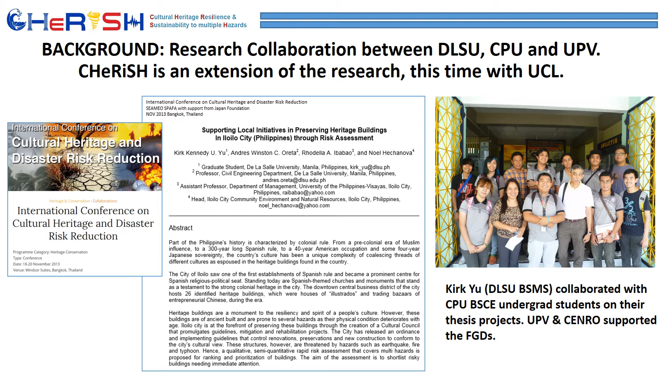First, let me present some impact of natural hazards to heritage structures, specifically during the Bohol earthquake of 2013. The Bohol earthquake is one of the strongest quakes in the Visayas in 23 years. It is described as an earthquake with energy equivalent to 32 Hiroshima bombs. It was a magnitude of 7.2, and from this earthquake there were many old churches which were damaged and destroyed.

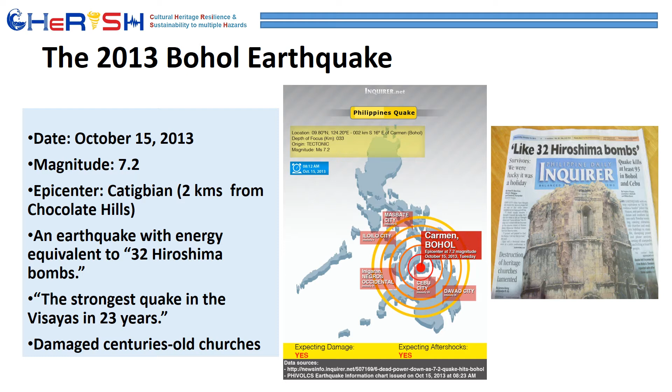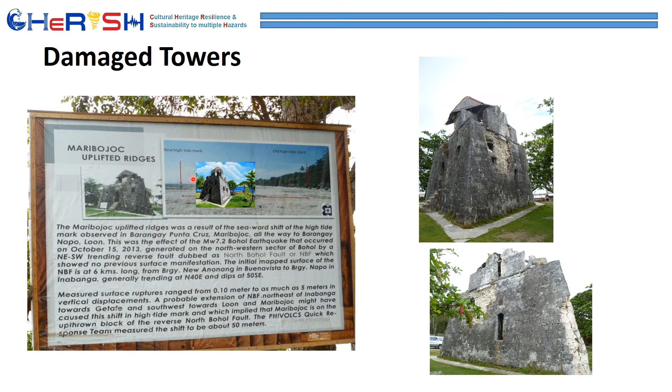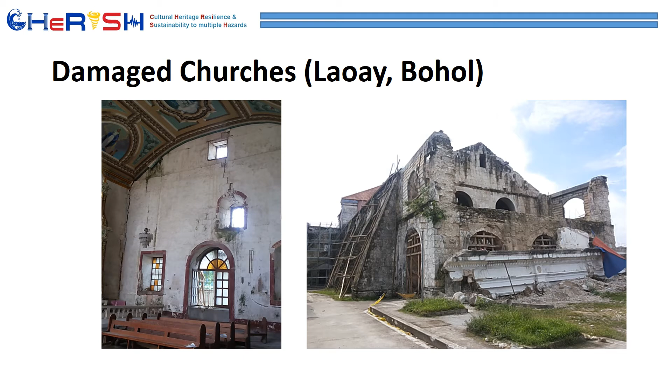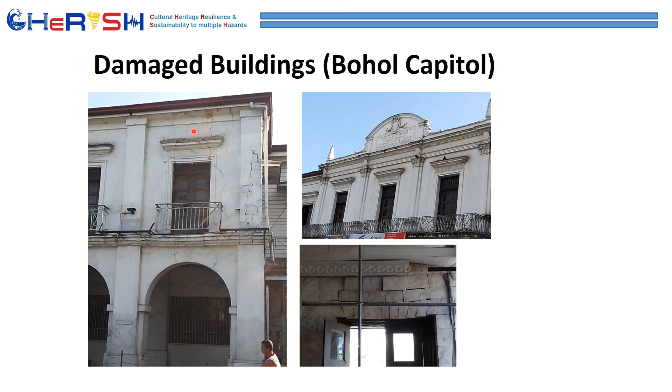So the question is, why do we need to preserve our heritage structures? Let me quote the quotation by Sui Yao. Says, "The old house is like a book. Enter and read it, and you will find yesterday, today, and tomorrow written on the page."

So basically, cultural heritage preservation is all about maintaining our nation's shared links with the past, the people's shared connections. Cultural heritage is also a set of symbols or links to the past. So imagine the impact of the earthquake in Bohol, wherein many churches were destroyed, some of them totally collapsed. Hence, the past about that particular structure is lost.

Let me present some principles and definitions on heritage conservation using the book by architect Augusto Villalon on Lugar, Essays on Philippine Heritage and Architecture. Architect Villalon is one of the advocates on heritage conservation, not only in the Philippines but all over the world.

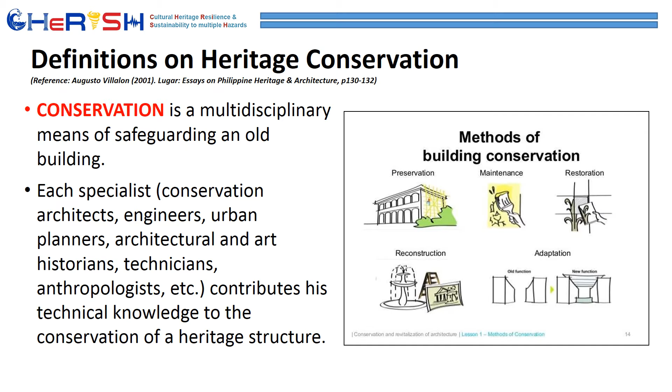First definition is conservation. It is actually a multidisciplinary means of safeguarding an old building. It involves conservation architects, engineers, urban planners, architectural and art historians, technicians, anthropologists, and many more. And they contribute their technical knowledge to the conservation of a heritage structure. There are various methods of building conservation, and let me define each of these methods.

Preservation is the cleaning and maintaining of a structure in order to extend its lifespan. This is the optimum and the best thing to do in heritage conservation. Shown on this slide are heritage structures. This one is the Intramuros Church, the San Agustin Church, which was not destroyed during World War II. And of course, Iloilo's pride, the Miag-ao Church, which is a UNESCO World Heritage Structure.

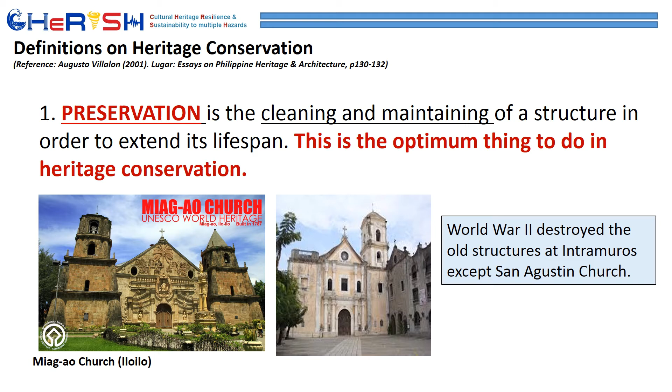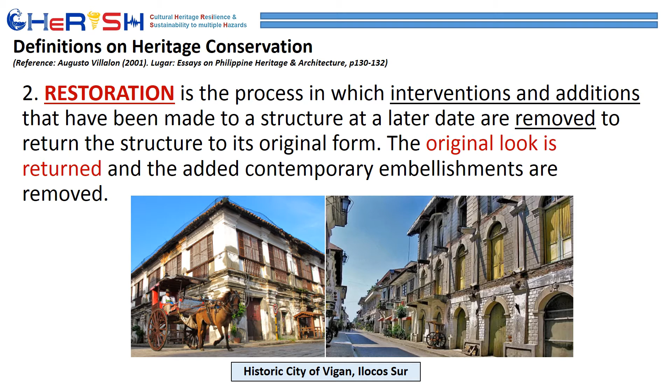Reconstruction is the rebuilding of a faithful copy of a structure based on original period plans and done under strict supervision by a conservation team. The classic example of reconstruction is, of course, the heritage structures in Intramuros, since most of the structures except the San Agustin Church were destroyed during the war. And these structures now at Intramuros are basically reconstructed heritage structures.

Another example is, of course, the Las Casas Filipinas de Acuzar. It is an open museum in Bataan. Some of the structures are original, some of the structures are reconstructed.

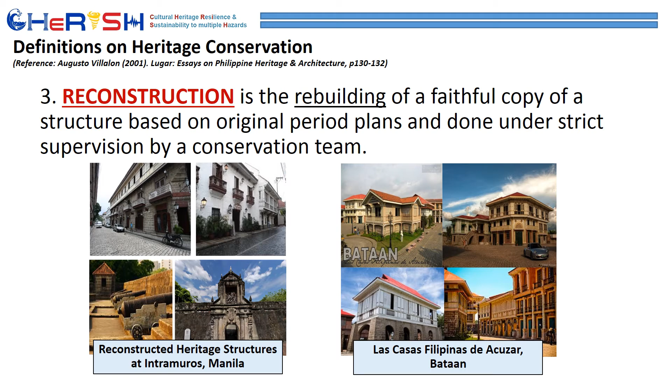Adaptive reuse is the adaptation of an old structure to allow the introduction of a modern function into the old structure. Old buildings are not demolished, but recycled into modern uses. The classic example in the Philippines is the rehabilitated structure, which used to be the Tutuban station at the Manila-Dagupan line of PNR and is now called the Tutuban Center Mall. So the envelope of this structure was used and became a mall.

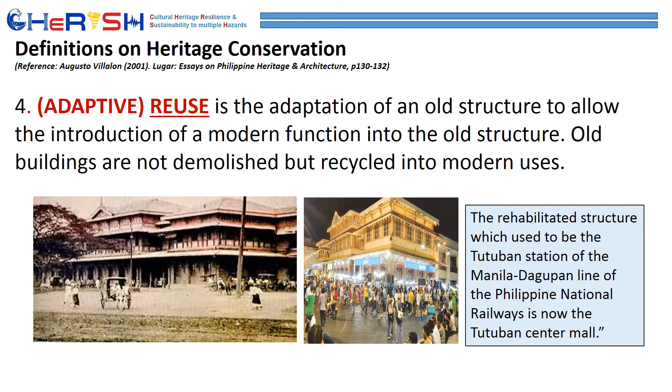The final strategy is remodeling, and it involves the drastic renovation without regard to the structure's original state and changes its character completely. When an old structure is remodeled, its authenticity, ambience, and historical value are gone forever. So this is not the best thing to do for heritage conservation.

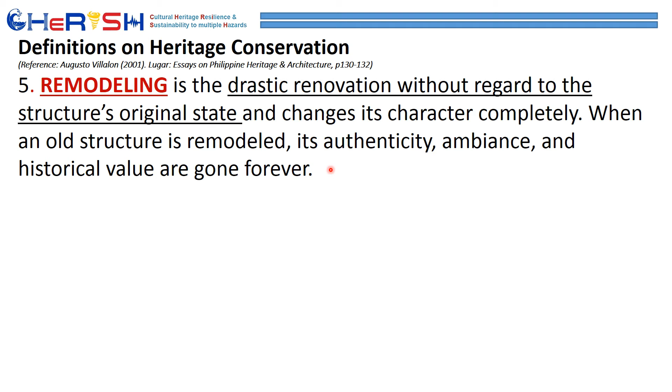An example is in Tayabas Church. Okay, in this particular remodeling, there were concerns on the renovations, specifically the ceiling part of the church. The comments are almost the entire wood ceiling was removed. The ceiling cannot anymore be claimed to be an authentic piece if you compare the before and the after remodeling. So the original church may exist, but some of the portions are not anymore authentic.

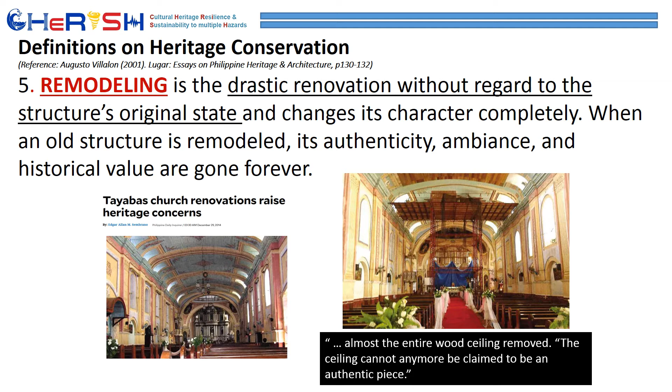According to the NCCA, the objective of conservation is to preserve for posterity the unaltered or the authentic state of a heritage structure, historic monument or site, as close to its original condition as possible, and that special care should always be given to carrying out restoration works as heritage structures are irreplaceable.

So it is advised that it is better to preserve than to restore, and to restore than to reconstruct. The key to heritage conservation is the less you touch, the better. So the best scenario in heritage conservation is ongoing maintenance to the original structure.

Since authenticity is of premium importance in heritage conservation, restoration must never be an imitation, falsification, or an attempt to compete with the original. So restoration should not alter the original as much as possible. When restoring monuments, it is advised that you must use materials similar to that of the original.

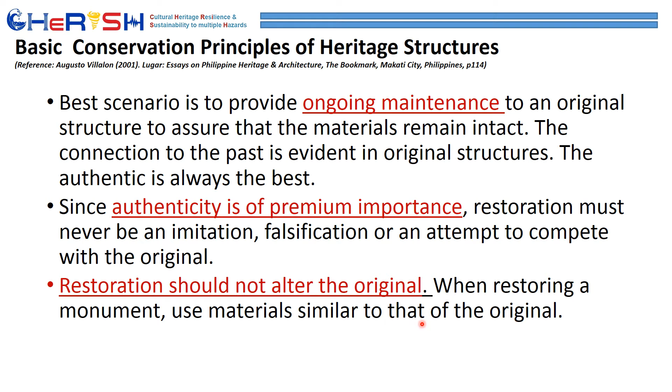So based on the concept of authenticity, the various methods of building conservation are rated as shown, where preservation is, of course, the best strategy for heritage conservation, followed by restoration and adaptive reuse. Then reconstruction. Remodeling takes the last suggested strategy for heritage conservation.

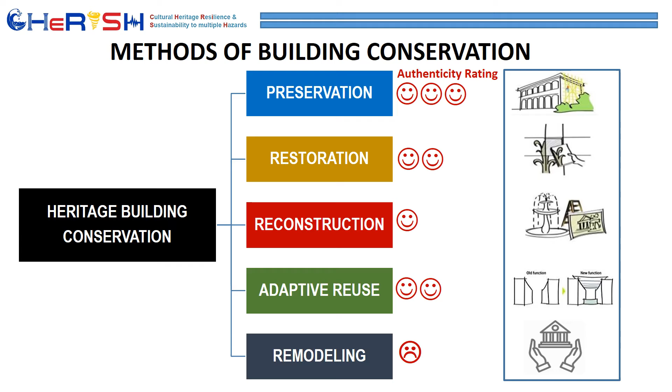Let me focus now on adaptive reuse of heritage structures. According to the reference by Villalon, cultural heritage preservation respects the past, of course, but does not bind us to it. It does not prevent us from moving forward. Instead, it strengthens and enriches our lives by preserving the valued traditions of our ancestors.

There is a present misconception that heritage structures should be lifestyle museums like Vigan and Taal. We venerate them as monuments to the past rather than reusing them and refitting them into our daily lives. Hence, adaptive reuse is proposed as another strategy for heritage conservation.

So what we need is to develop or to assign heritage zones in cities where heritage structures are rehabilitated and reused not only as museums but for modern living. So heritage structures should blend with newer and modern buildings.

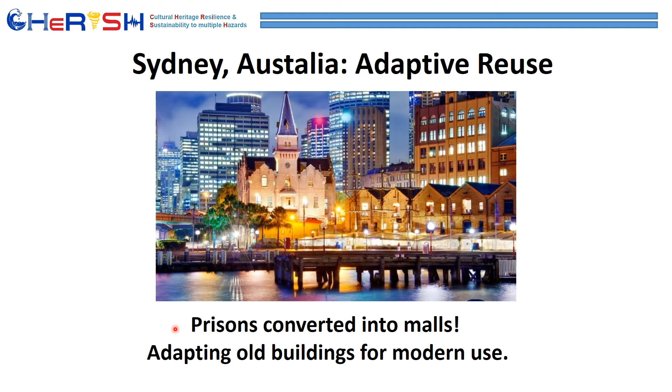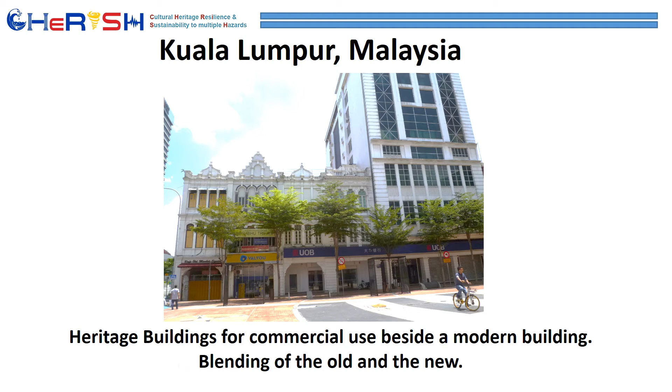Examples of best practices of adaptive reuse can be found in other countries like Sydney, Australia, wherein prisons were converted into malls, hence adapting old buildings for modern use. Kuala Lumpur, Malaysia. Heritage buildings for commercial use are maintained and stand side by side with modern buildings. So there is a blending of the old and the new.

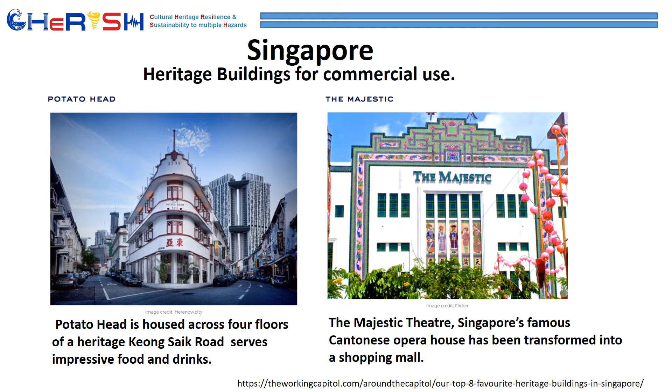Singapore. Heritage buildings for commercial use. Examples, we have here the building. Potato Head is housed across 4 floors of a heritage building on Keong Saik Road, which serves impressive foods and drinks. The Majestic Theatre, similar to our Metropolitan Theatre in Manila, is Singapore's famous Cantonese opera house and has been transformed into a shopping mall. Of course, Tutuban Center Mall, which was rehabilitated to become a commercial center.

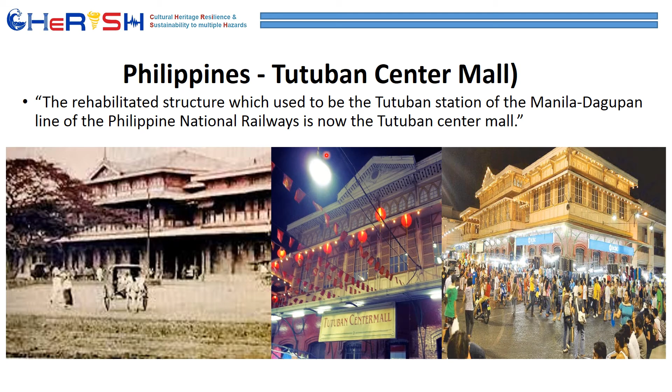In Iloilo City, an ordinance declaring certain building structures or sites as local heritage or legacy buildings and creating the Iloilo City Cultural Heritage Conservation Council. So a heritage zone was created along Calle Real, identifying specific buildings as shown in the list. These buildings include neoclassical style and Art Deco type of architectural buildings. And most of these buildings are used for commercial or assembly areas.

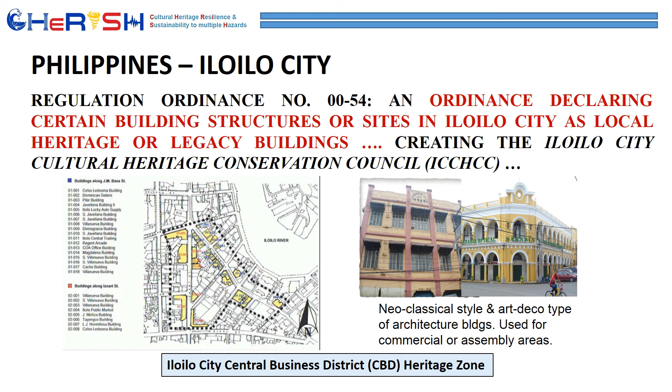There is Republic Act number 10066, an act providing for the protection and conservation of the national cultural heritage, strengthening the National Commission for Culture and the Arts and its affiliated cultural agencies and for other purposes. In this RA, there are relevant definitions, like what is built heritage. It refers to architectural and engineering structures such as, but not limited to, bridges, government buildings, houses of ancestry, traditional dwellings, quartels, train stations, lighthouses, etc.

A heritage zone shall refer to historical, anthropological, archaeological, artistic, geographical areas and settings that are culturally significant to the country. And adaptive reuse refers to the utilization of buildings, other built structures and sites of value for purposes other than that for which they were intended originally in order to conserve the site, their integrity, and authenticity of design.

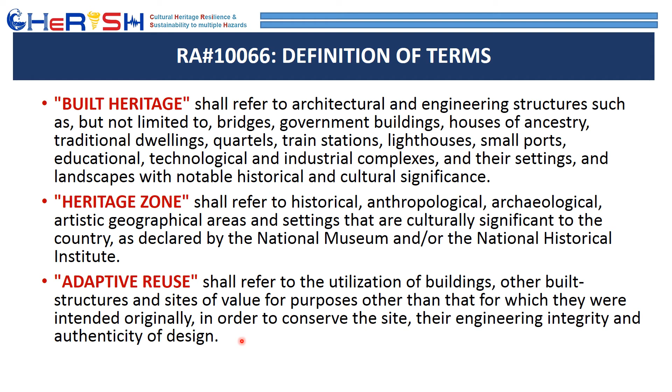Also in this RA, there are specific sections which I would like to highlight. For example, Section 5, structures dating at least 50 years old are included in the list of important cultural property that will be protected against exportation, modification, or demolition. Section 7, privileges for cultural property include priority in government funding for protection, conservation, and restoration, incentive for private support of conservation and restoration, and priority protection during natural disasters and other emergencies.

Section 12 is the designation of heritage zones, and Section 13 is the maintenance of heritage zones. A heritage zone shall be maintained by the LGU, and the LGU will implement adaptive reuse of cultural property.

So what is the role of structural engineering in heritage preservation? First, let me list down common reasons for assessment of heritage or historic structures.

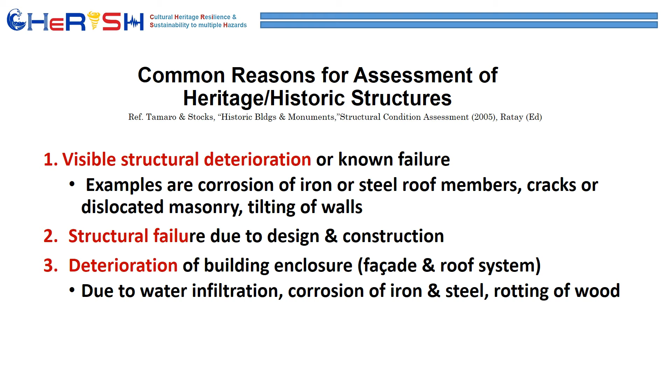Number one, there may be visible structural deterioration or known failure. Examples are corrosion of iron or steel members, cracks or dislocated masonry, or tilting of walls. Two, there may be structural failure due to design and construction. Three, deterioration of the building enclosure or envelope, the facade and roof system, due to various environmental factors like water infiltration, corrosion, and rotting of wood.

Four, there is a lack of documentation regarding the structural capacity of the building. Many historic buildings do not have design live load capacities, and an analysis may be necessary to determine the existing capacity due to present live load, especially when used for adaptive reuse.

Five, change of use or increased capacity is required. As mentioned, adaptive reuse often changes the live load requirements of the building. Number six, there may be severe events which may have damaged existing structures due to earthquakes, wind, flood, or blast. And number seven, because of the campaign for heritage conservation, compliance to heritage preservation requirements.

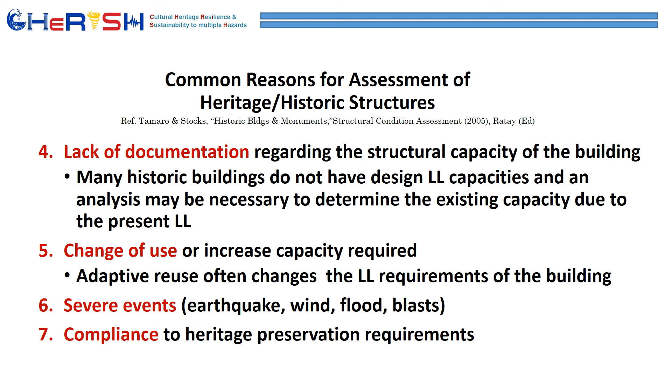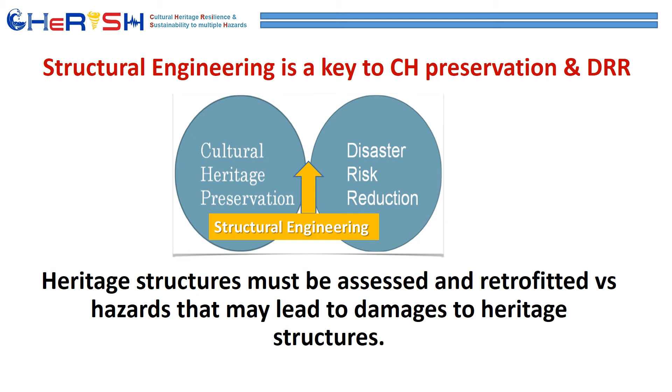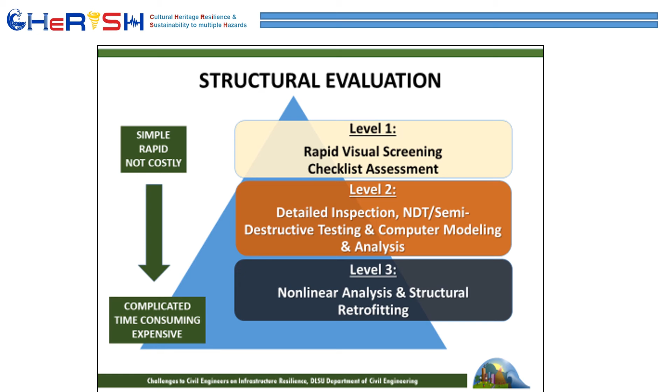In Level 1, rapid screening and prioritization involves the following objectives: to group buildings according to asset value, importance, or use; to rank buildings according to risk; to prioritize which buildings need immediate attention for more detailed structural evaluation; and to decide what action must be done, either retrofitting, strengthening, repair, or simple maintenance.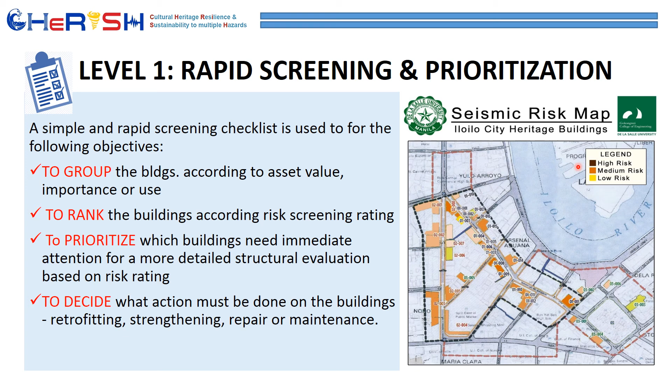This is an example of a set group of buildings, screened based on risk. Buildings with higher risk must be prioritized for more detailed inspection.

Level 2 involves non-destructive and semi-destructive tests. Non-destructive testing is the most appropriate approach for estimating in-situ mechanical properties of materials and diagnosing the structural condition of heritage structures, since there will be minimal alteration of the structure, thus preserving the authenticity of heritage structures. So the challenge in NDT

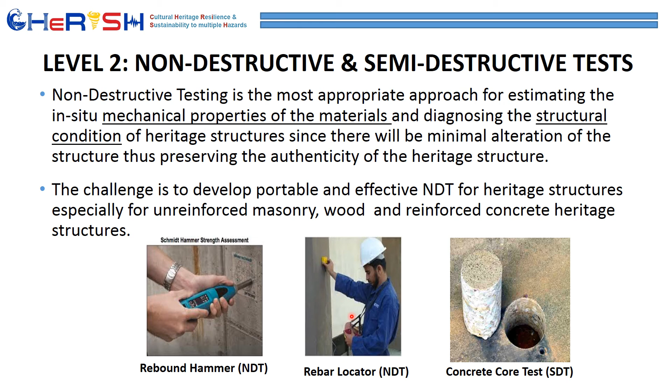is developing tests for unreinforced masonry, wood, and reinforced concrete heritage structures with minimal alteration. These are examples of NDT and SDT: rebound hammer, rebar locator, and concrete core test.

Aside from those tests, there is a list of various non-destructive and semi-destructive tests as shown in this table. Each of these tests has its own objectives, and when to implement a test depends on the intervention.

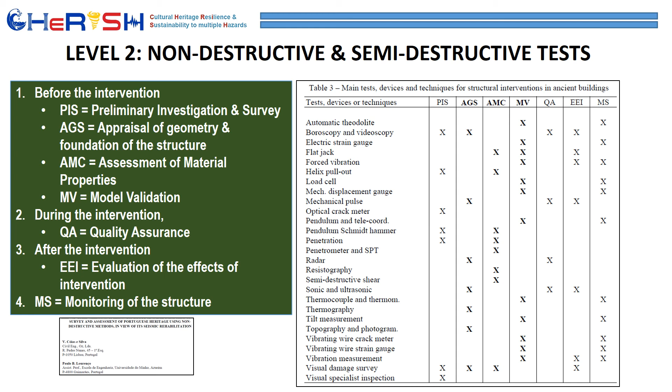Before the intervention or retrofitting, you have to conduct preliminary investigation and survey. You must appraise the geometry and foundation of the structure, assess material properties, and then apply model validation. During the intervention, you must maintain quality assurance, considering authenticity. After the intervention, such as retrofitting, you evaluate the effects on the structure for safety and authenticity, and of course monitor the performance of the structure due to future events.

Shown in this image are non-destructive and semi-destructive tests conducted on one heritage structure in Quezon. This is research conducted by one of the graduate students at De La Salle University on this heritage structure in Quezon. These are the tests: concrete core tests, rebound hammer tests, rebar locator, and ultrasonic pulse velocity, or UPV.

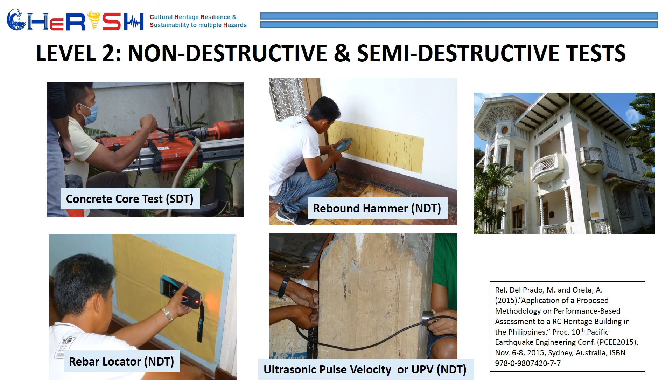Also in this same test, this is the original heritage structure in Quezon, and this is the computer model of the structure. It was analyzed and its performance was assessed before and after intervention.

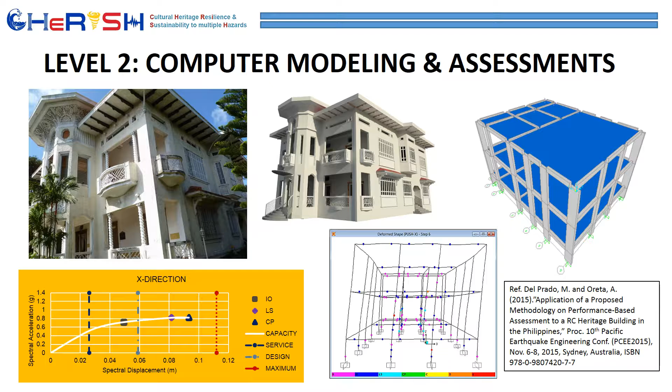Finally, Level 3 involves structural retrofitting, and there are various ways of retrofitting, from local to global. Depending on the type of material, there are various strategies recommended for structural retrofitting.

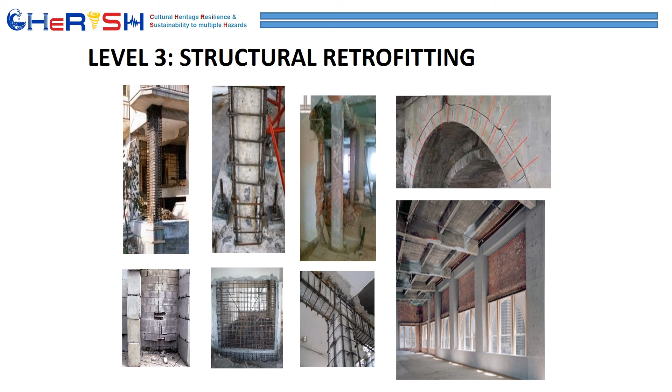If retrofitting work is done, it should be reversible to the greatest extent possible, to allow removal for future use of improved systems and the traditional repair of remaining historical materials.